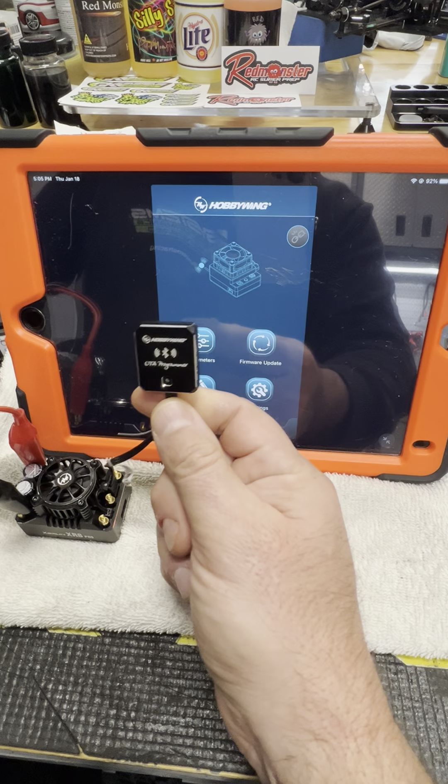Now I'm going to say my preferred method is using this device right here. This is the OTA, or the over-the-air programmer, and this is Bluetooth. What's nice about Bluetooth is your iPad or tablet or whatever device you're having can still be connected to Wi-Fi. Therefore, as soon as you open up your app, if there are any app updates and you're connected to a good Wi-Fi source, it'll just download them, and you don't have to move back and forth between different Wi-Fi devices. Plus, your Bluetooth connection is significantly more robust. It just works better.

I already got it hooked up to a battery. I'm going to power on the speed controller. I get a light. You're going to notice the fan. The models that have a smart fan, the fan will go for a second, turn off. That's normal. Your OTA has got a red light. It is ready to connect. Now, this is a brand new OTA, so it's still going to be default. The default password is all 8s. I do recommend remembering the password after you've changed it, but for right now, I'm just going to confirm and log in.

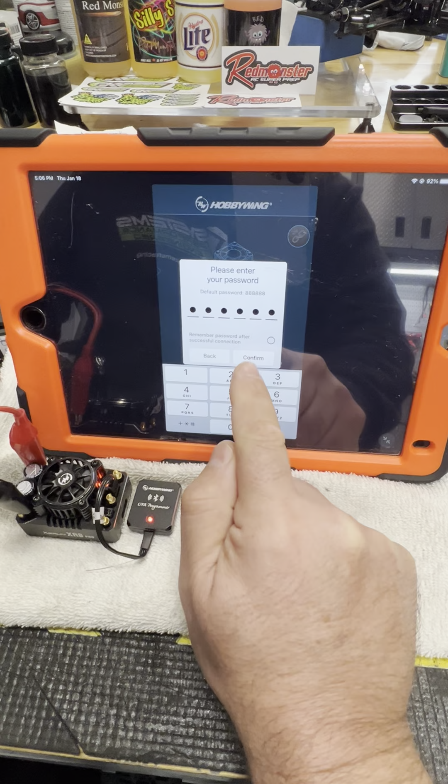Now, at this point is when I like to go to my settings, and I just want to get this done, get it out of the way. For the sake of the video, I'm not going to do this right now, but settings of the Bluetooth module. And here's where you're going to change the name, change the password, all that good stuff. Do something unique. That way you can identify yours in the sea of Wi-Fi modules, wherever you'll be. And no one will accidentally get onto yours by putting in the default password. All right.

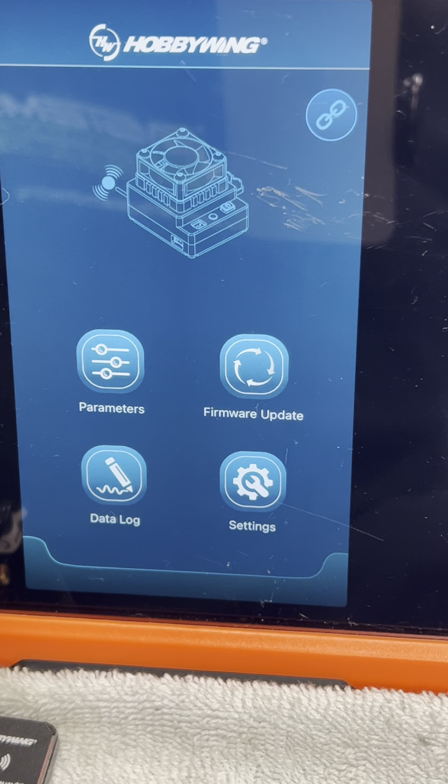Let's dive into the speed controller. After I do my Bluetooth settings, the very next thing I like to do is a firmware update. I want to make sure that I'm working on the most current firmware before I put a lot of work into the speed controller, because it's just going to wipe it out. You're going to have to do it over again. For the sake of the video, I've already done my firmware update, but this is where you would go. You'll see that my target version and my current version are the same. No reason to do it. If you want to check, you can check what your different firmware versions are.

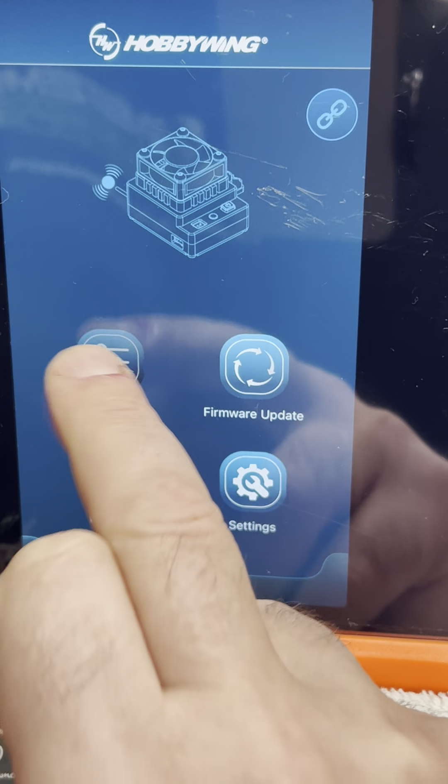Let's dive into the parameters. When you connect to it, it's going to upload the current parameters. I've already programmed this speed controller for a customer, but we're going to switch profiles and start with a brand new profile so we can go through it. When you hit there, you're going to see 0 timing, 1/8 off-road, and drag race. This is mine. I like to put it here just to have these free. So let's go to 0 timing, and we're going to start from scratch.

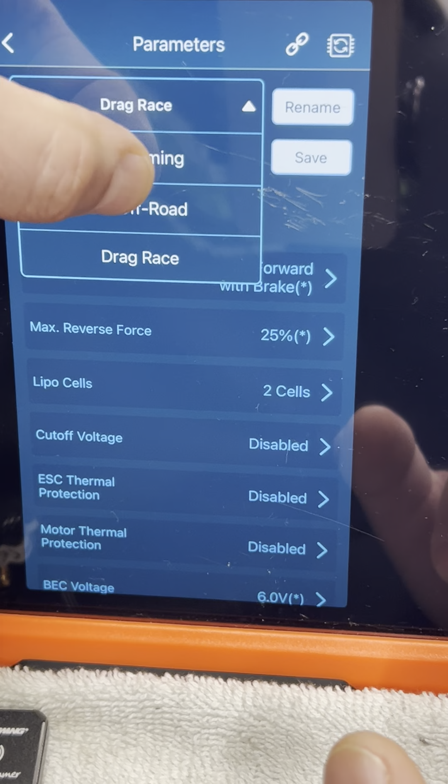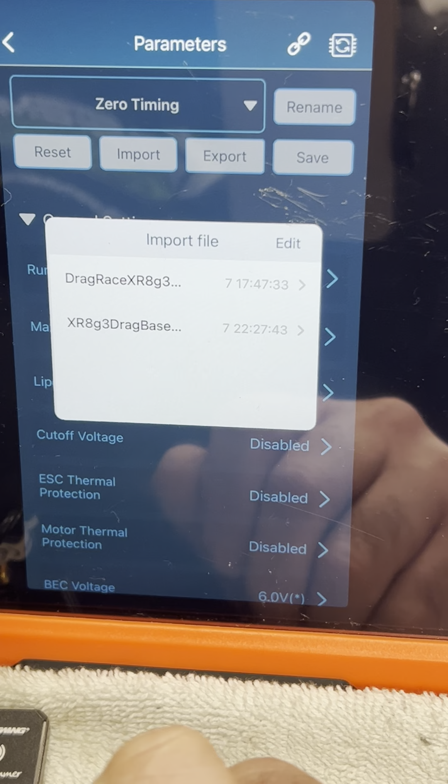Something to be aware of is anytime you make changes, you hit the save button and it'll save. If you have a really nice tune, you can export it and then re-import it at a later date. Let's say you make some changes, you don't like it, you don't remember what you changed, you just hit import. In this case, I go import, you already see I have a base. I can click this and it'll import it. Import, you see it already changed it over to drag race, and it put it right back to where it was. So let's go to a profile and we'll go from there.

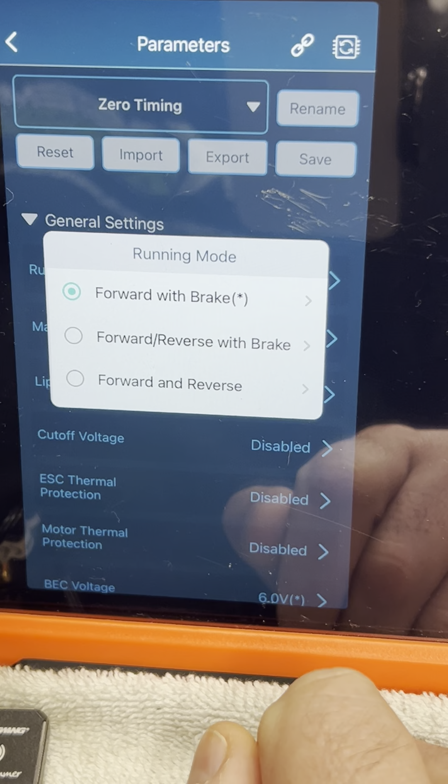Running mode, this is the first one, and it is set to forward with brake. I like forward with brake because most racing organizations do not allow reverse anyway. If you are running reverse, which is fine to do, understand that sometimes if you are moving the brake around on the radio, you could accidentally engage reverse. In some cases, that could be very bad. If you feel like you need reverse, you can use it, but I definitely don't recommend forward and reverse. I'm not even sure why that's there, but it is. So forward with brake for me.

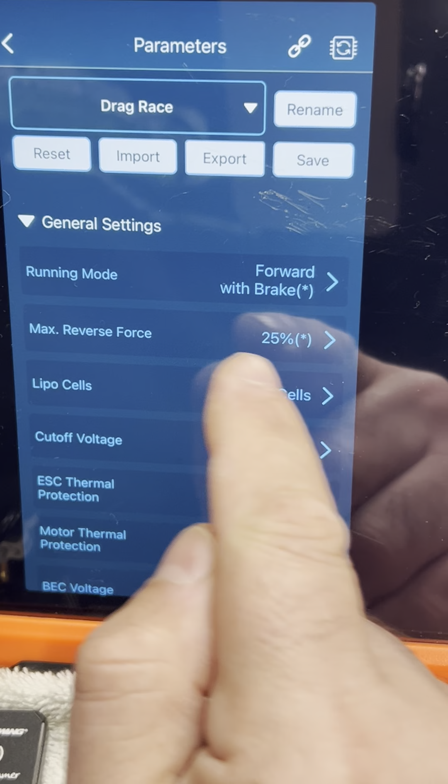Apologize, I'm trying to do this through the camera. Now your max reverse force, again, we're not using reverse. Let's go to 0 timing. Just want to start fresh. Max reverse force, I'm not using reverse, so we don't need to worry about it.

My LiPo cells is set to 2. You can have it set to auto, 2, 3, or 4 cells. I already know that I'm only using this particular one on 2 cells, so I'm just going to put it there. Cutoff voltage, ESC thermal protection, and motor thermal protection, you may notice, are disabled. I recommend just starting out with them disabled if you're new, and then turn them on.

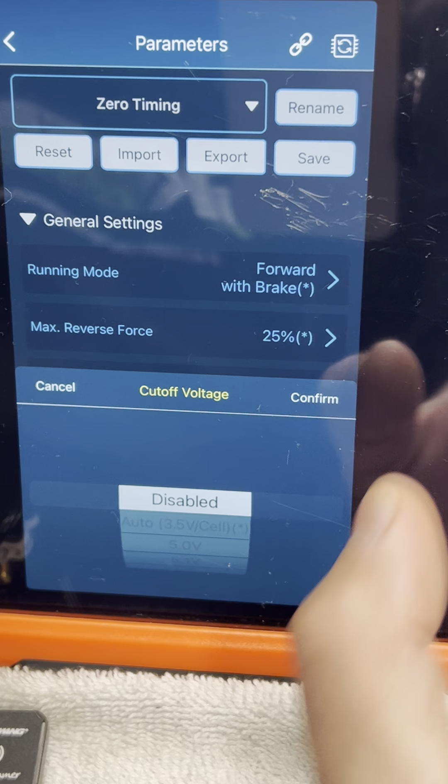The reason I say this is what I don't want to see people do is inadvertently have a setting in here that messes up with something that they're doing on the car, and they don't know what it is. So if these are all disabled, you can start turning them on one at a time, and if something happens, you can at least troubleshoot it back to that.

Now, I will tell you, for 95% of the applications, you should be using these protections. They're very helpful. They're there to protect the motor, speed control, things like that. But just to eliminate the initial variables, start with them disabled. If you're drag racing, 100% keep them disabled.

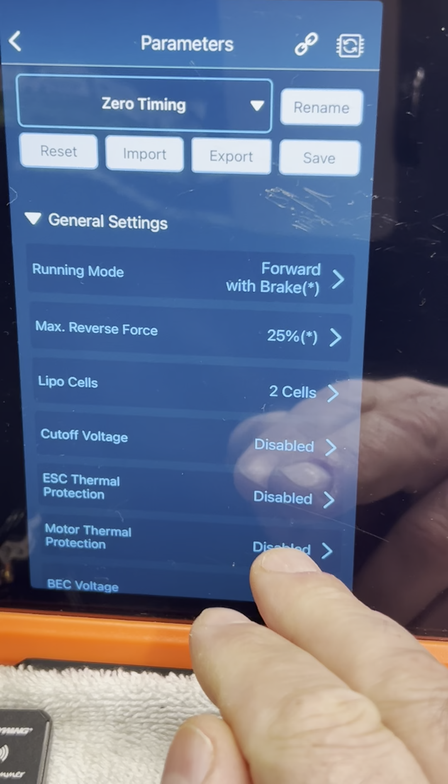If you're drag racing, you really should know what you're doing. Pay attention. You should not be running your battery voltage down, and you should not be hot lapping it, getting it too hot. Okay? But if you're not drag racing, you're doing something else, you should be running these. But just to get it running the first time, let's eliminate the variables.

Your BEC voltage, this is your battery elimination circuit voltage. This takes the place of when we used to have battery packs on our cars to power our receiver and servo. Right now it's set to 6 volts. You do have the option of 7.4. This is for high voltage servos, receivers, things that can accept 7.4.

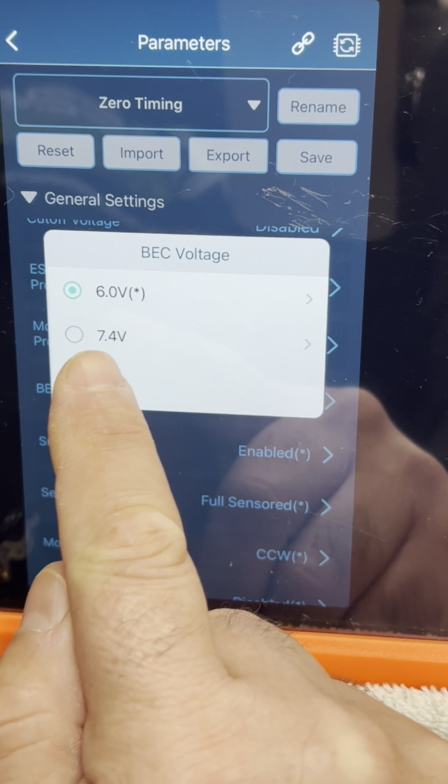The reason you would use this is your servos may be stronger and maybe they work quicker. You may get more torque out of them, so on and so forth. But this will be with compatible servos. It's just safe to run 6.0 unless you really know you want 7.4.

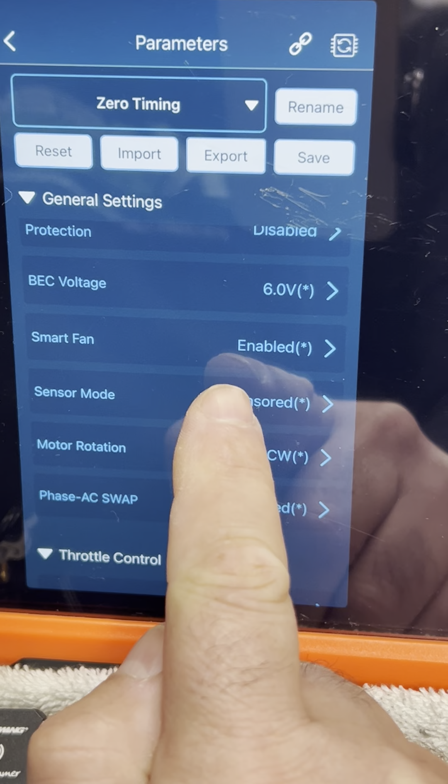Here is your smart fan. Smart fan is enabled. If for some reason you want your fan to run all the time, you would disable it. But HOBBYWING's done a great job with this. Speed controller, leaving it enabled is a good way to go. Sensor mode, fully sensored. Now this is the one that trips some people up.

HOBBYWING will tell you in their manual, if you read any of their literature, full sensored with their speed controllers is only recommended when paired with their motor. This will become apparent when we get through this video, but their motors communicate with the speed controller in a certain way that the speed controller takes advantage of, the communication protocol, to realize some additional benefits that are in the program and they're just not available with different brands.

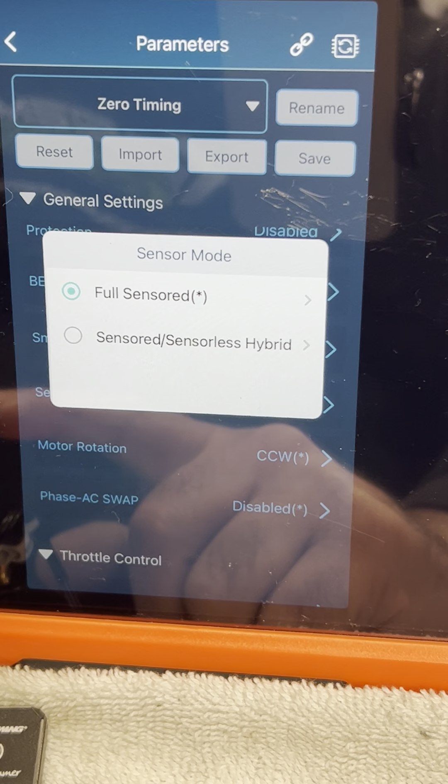The motors, on the other hand, are compatible with any speed controller. When you're using the HOBBYWING, especially these new generation speed controllers, the most current ones, they are designed to be paired with a HOBBYWING motor. If you do not pair it with a HOBBYWING motor, it's fine. You will just select this hybrid mode and you're good to go. But because this is going out to customers and you're using it with the new Drag Race 6500 big block, we're fully sensored and we're ready to go.

Motor rotation, counterclockwise. This is the standard direction in RC. We go counterclockwise. Now, there are some chassis installations and things like that that require the motor to go the other way, clockwise. All right? If you need to do that, here's where you do it.

You will not, and I repeat, not swap the wires like some people have done on some of the older systems. If you've been into RC for a while, you are not swapping the wires to change the motor direction. It's very bad. Don't do it. These new speed controllers, you are not meant to swap the wires. Now, this is going to lead to something that is going to contradict what I just said, but it's for a different purpose.

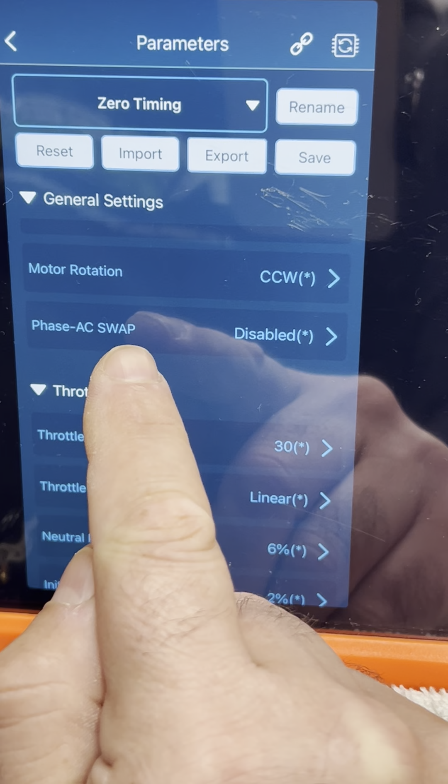Here is your AC swap, okay? This is to swap the A and C, but only for the purpose of when you've connected it to the motor backwards. Why you would do this is because it makes the wires lay out in a way that's more advantageous for some reason. So in this case, you're going to have the A on the speed controller going to the C on the motor, and the A on the motor going to the C on the speed controller. Instead of going A to A, B to B, C to C, the A's and C's are swapped.

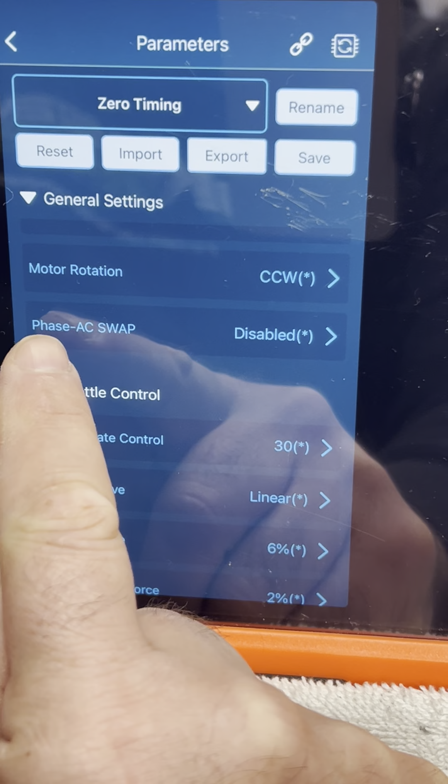That's when you use this. It is not to change the direction of the motor. It's simply to tell the speed controller that for whatever reason, you have taken the A and the C and swapped them to the motor, and everything will continue to work normally. Motor rotation is where you change the direction of the motor. Phase AC swap is just because for whatever reason you needed to swap the wires, okay?

Throttle rate control is a number that is assigned to the throttle sensitivity. It's essentially a quickness to the throttle that changes the feel of the car. Now, I will tell you, these HOBBYWING speed controllers are very powerful, as most speed controllers are, and most people tend to overuse this number. For what I do, I like a number between 4 and 5. Sometimes I start at 1 and I just work my way up until I'm happy.

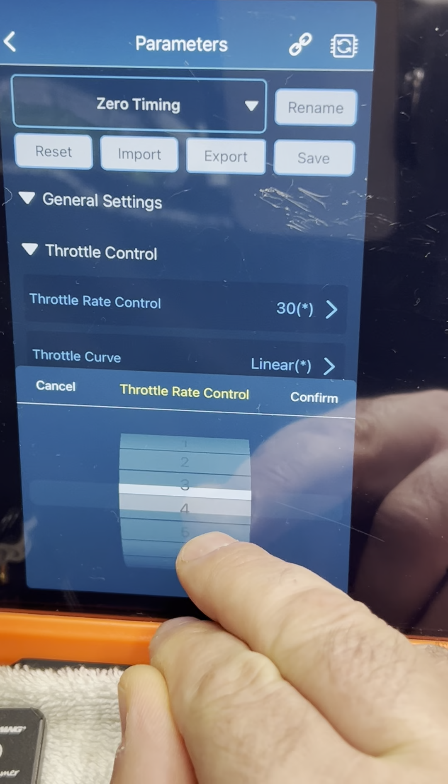The only time I ever find myself maxing this thing out is when I'm using a very, very small motor. What I mean by small is a very high turn motor, a 21.5, a 25.5, maybe even a 17.5, and it just has no power, and I'm not very sensitive with the throttle. I'm being very aggressive with the throttle because the motor needs all the help it can get. But if you have a powerful motor, a mod motor, a drag racing motor, things like that, start at 1.

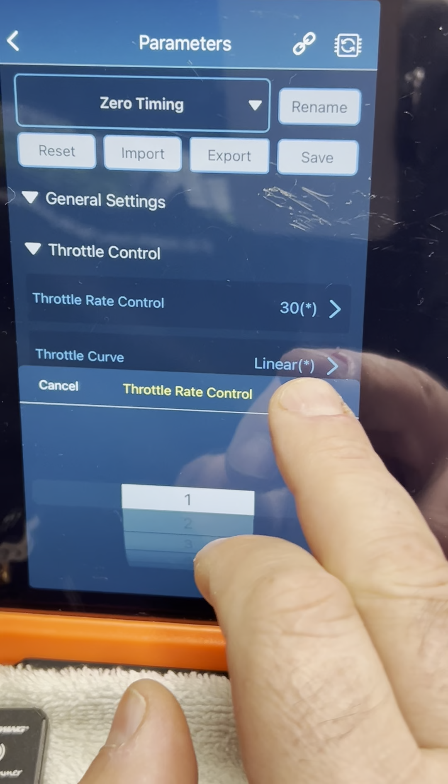All right. Honestly, you're not going to know what 1 does until you try it. So start at 1. I already know from my setup from testing that 3 to 4, 5 maybe is pretty good. But if you're new, just start at 1. It's going to help you out. And then do this one at a time, see how it feels.

Throttle curve. This is the big one, guys, especially if we're drag racing, but it's useful for a lot of things. I think the throttle curve is underutilized by a lot of people. Let's talk about it. So you see here right now it's set to linear. Linear is pretty standard, just a straight line. We're going to go to customized. Now you see when we are customized, it starts out as a straight line. What does all of this mean?

Well, the bottom is the throttle position. This is the input from the radio. Remember, the radio is outputting a signal and the speed controller is receiving it as an input. These are the inputs, 25%, 50, 75, 100, so on and so forth. But there's nothing saying that the motor power output has to be 1-to-1. Does not have to be. Matter of fact, there's a lot that we can do by manipulating this curve.

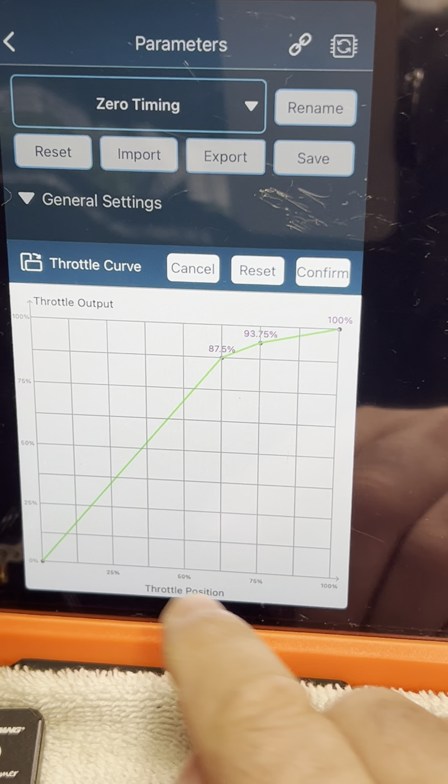So for instance, let's say that we want a little bit more torque at 50% throttle. Maybe we even want a little bit more torque over here, over here. You see, there's all kinds of things that we can do. And at the same time, maybe we like this ramp, but maybe it's a little too aggressive here. Well, let's just knock it down a little bit here. And we can change the way this is. Now, again, this is not a curve that I'm saying you should use. This is just an example, but it's an example of the way you might want to think about it.

Now, this is going to tie into something we're going to talk about in a minute. So for the sake of this video, we're just going to leave it right here. Now, you see, this is pretty aggressive. At 50% throttle, we're at more than 60% motor power. And then by 75%, we're almost at 100. But let's just pretend that our drag car can use this, all right? And I think this is a pretty smooth looking curve. So we're going to confirm and save it, all right?

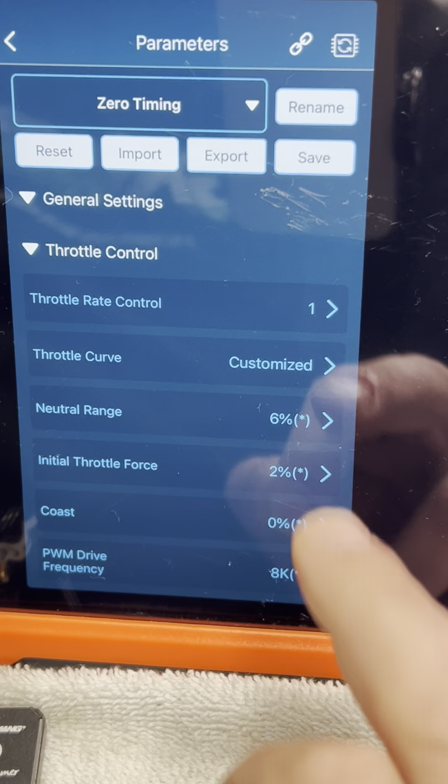So it's there. Now, our neutral range, this essentially is the amount of play in your radio before it goes into the power curve.

So essentially, how much play is in the radio before it clicks over. I personally like 4%. I've tried 3%. 3% is just too edgy. I think just even resting your finger on the trigger can move the car. But I think if you're just gentle, you can put your finger on the trigger at 4% and the car won't move. And then the very instant you put any pressure on the trigger, it starts moving.

But it's not saying that you need to use that. If you're doing a different kind of racing that needs a smoother application, or maybe it's a very high power motor on a very loose off-road track or something, you might want 7, 8, 9, 10%. I don't know. 6% is the default for drag racing. For my personal taste, I like 4, but that is a personal thing.

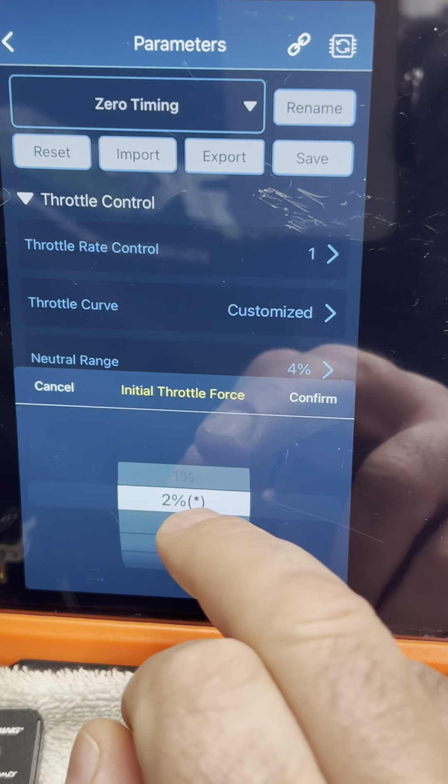Initial throttle force is exactly what it means. How much force will be initially applied before it moves over to the throttle curve. So you just cracked neutral from your neutral range. How much is it kicking the motor? Now, any of you may have watched my reel on the new HOBBYWING drag motors. They start very easy. They do not need a lot of power to start. I have no problem starting that motor at 6%. But for drag racing, I'm going to kick this up to 10 to 15%, and that's just the amount of crack.

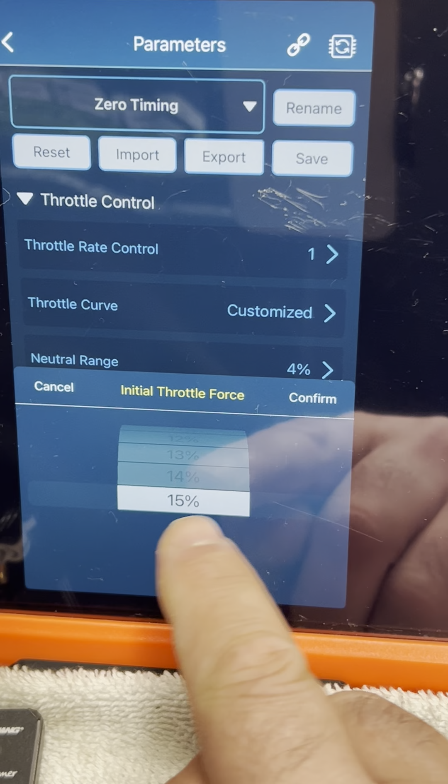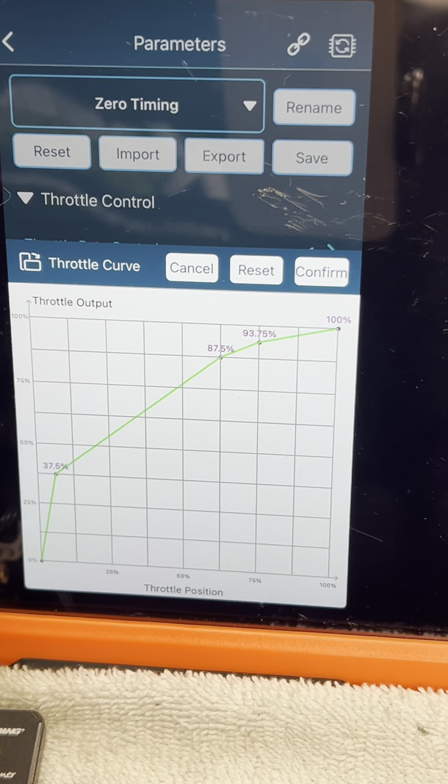Now, I will say, because I already hear some people, what if I need more than that? Well, it's very simple. You go here to your customized, and you will raise these points, and you're going to use the point on your radio. Remember, guys, when we're doing radio tuning, that's a different topic. Point is going to shoot over to some percentage, and then we're going to have some throttle delay, right? We may use a point that shoots up to here, and then we go on some delay. And this curve may be a curve that we like. I don't know. These are just the possibilities.

All right, maybe we want more. Maybe we want to shoot up to here and use that kind of curve. These are all possibilities. So you know what? Actually, I'm going to leave this curve and get to something that I'm going to talk about that's nice on this speed controller. All right. So that's our initial throttle force.

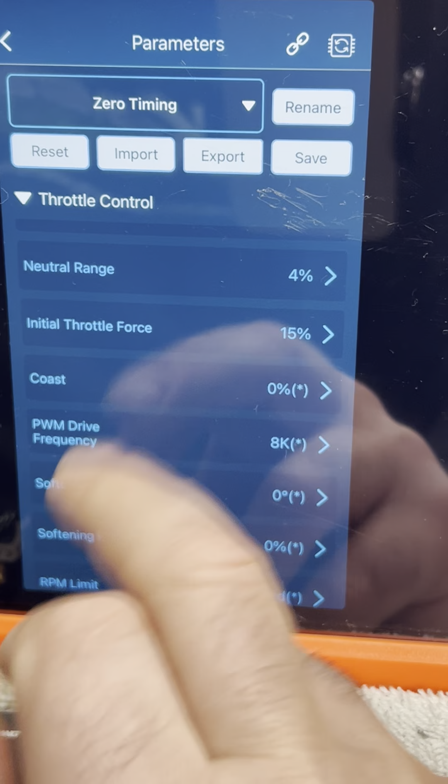And then here is coast. What coast is, a small amount of power that's applied to the motor so that the motor has no braking effect. If you imagine, even if you put it in neutral, if you ever tried to turn your motor by hand, it has some resistance because the magnets have some resistance. So that resistance acts as a very, very small light drag on your drivetrain.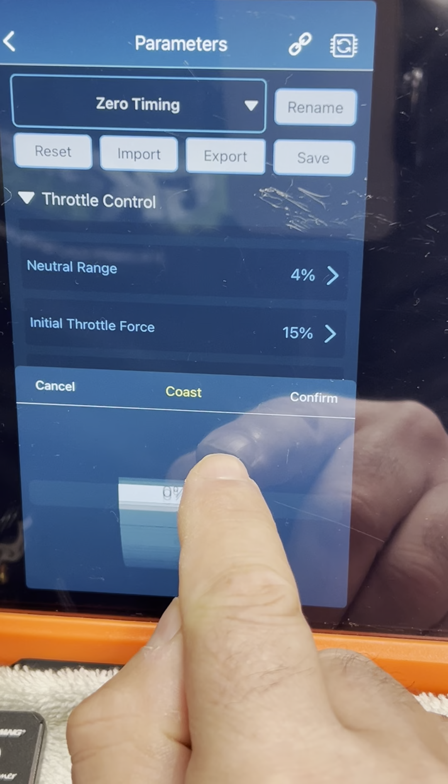Now, there may be some racing classes or things that happen in your driving style that you do not need that little bit of drag because maybe it's making the car pushy or it's doing something that you don't like and you just want it to be free, like as if you were in neutral. Well, that's what you use here. You would just apply some coast amount. This is just some very light amount of power that's applied during neutral, and it is there to essentially just keep the motor from, sorry about that, guys, just keep the motor from dragging down, okay?

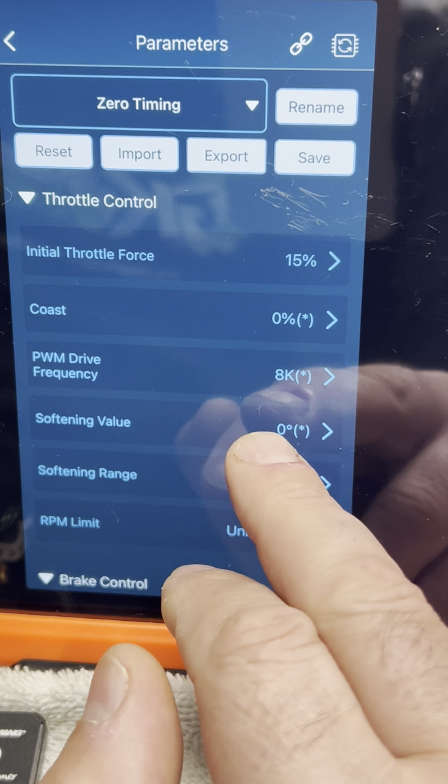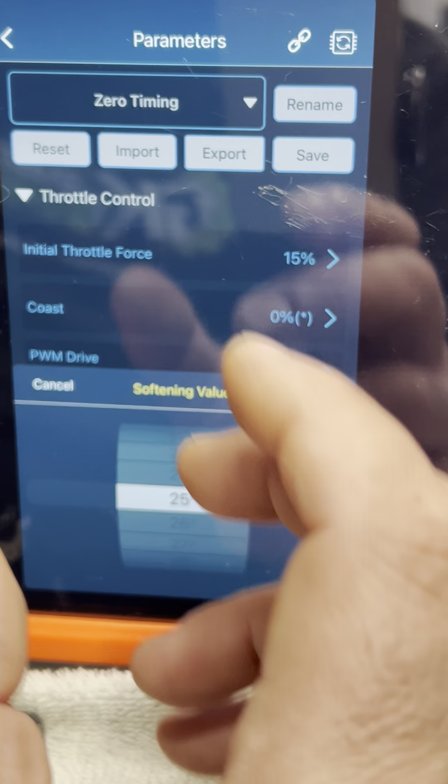Now, this is what I was alluding to. Softening value and softening range. This is the opposite of timing. It is like retarding timing, okay? Softening value, you see, it's all in degrees. So just like a full-size car or electronic fuel injection or even the end bell timing on your can, you can use timing retard to knock that down. This is very advantageous because it may allow you to adjust your motor end bell to some number that is going to be advantageous on the top end and then just knock it down here.

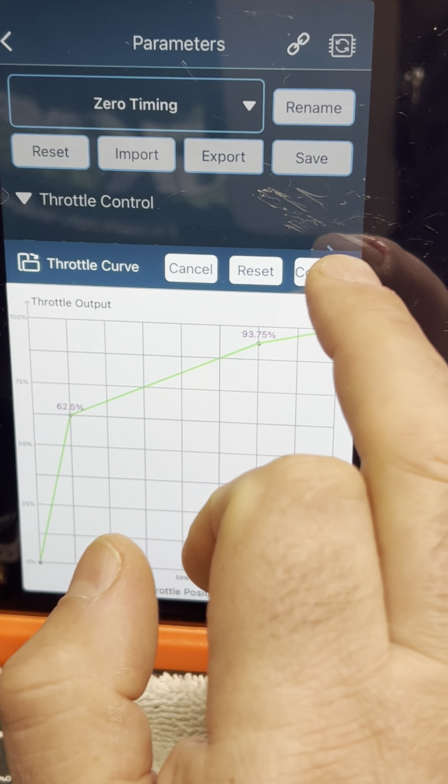Remember, it's also the equivalent of just knocking back your end bell, which a lot of people do. So tons of positive benefits to softening value and softening range. Again, do I think you should start there? No, I think that you start at 0 and use it as applied.

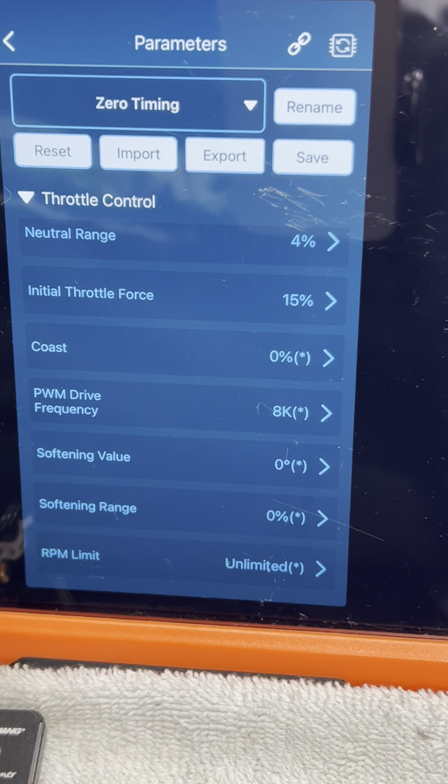Something I'm going to just inject in here. When you're tuning, you should always be asking, what is it that I need? I think a lot of people, and I know because a lot of people call me for advice, they're trying to put something in their speed controller that they think they want, but they don't really know that they need it. And I think that you should always identify what you need and then start thinking about how to get there. So think about what you need. And if it's like, I need a little bit less in this area, well, this may be a good way of doing it.

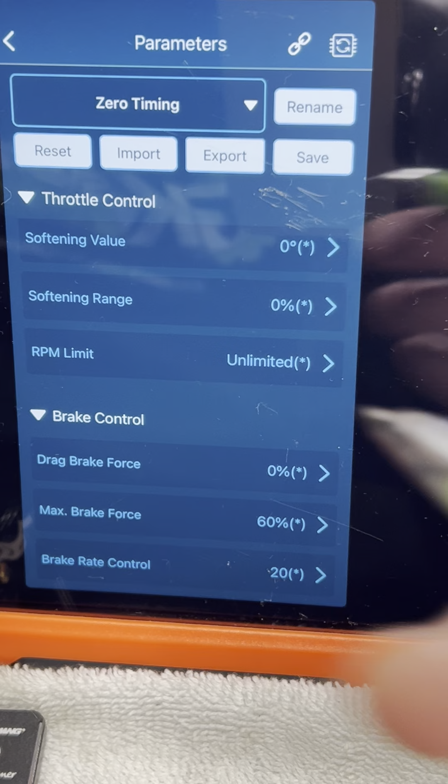RPM limit. This is exactly what it sounds like. This is a global rev limit that will not allow the motor to rev past a particular RPM. So just as I've said before, and this is going to be a recurring theme, when you're starting out, turn this off, okay? Let's not have something interfering with your initial setup tuning. Let's understand what we need. If we need an RPM limit, let's use it. If we don't, maybe we don't need it.

Brake force, max brake force, brake rate control. These are all your braking parameters. Now, here we have drag brake force. This is what I was talking about earlier. This is not the coast. This is the amount of brake that will be dragging when you apply neutral. So when you let go of the throttle, the speed controller may apply whatever number you put here. So let's say you put 10%. That is an immediate 10% of braking power right at neutral. So the motor is going to be dragging with about 10% braking force.

This is actually quite useful because if you have a scenario where you need to get off the throttle and balance the car before you apply the brakes, a little bit of drag brake goes a long way because as soon as you let off, it's already starting to apply a little bit of braking, helps stabilize the car, and then you go. Max brake force, also exactly what it sounds. It's the maximum percentage of braking power that can be applied.

I recommend personally just running this at 100 and then move it to what you need. I'd rather have a little bit more and play with it than be capped at something less. And then all of a sudden you've done all this brake tuning and then you realize, oh, Jesus, I need more brake, and it messes up your tuning. Start with 100, knock it down if you need to, but drag brake force is definitely a good thing. Don't get carried away with that. Just a little bit goes a long way.

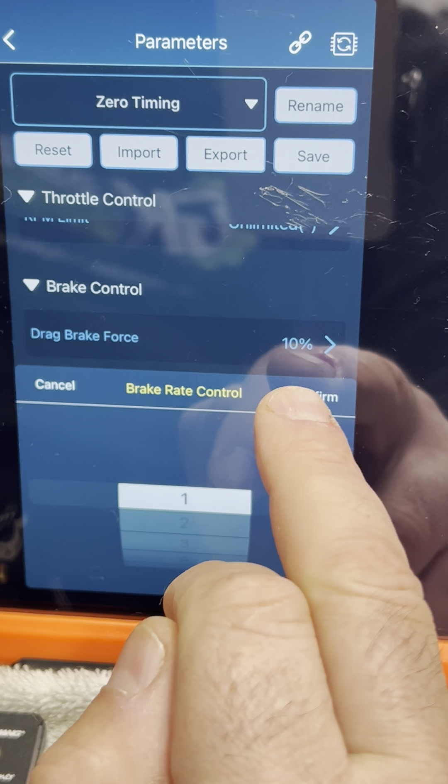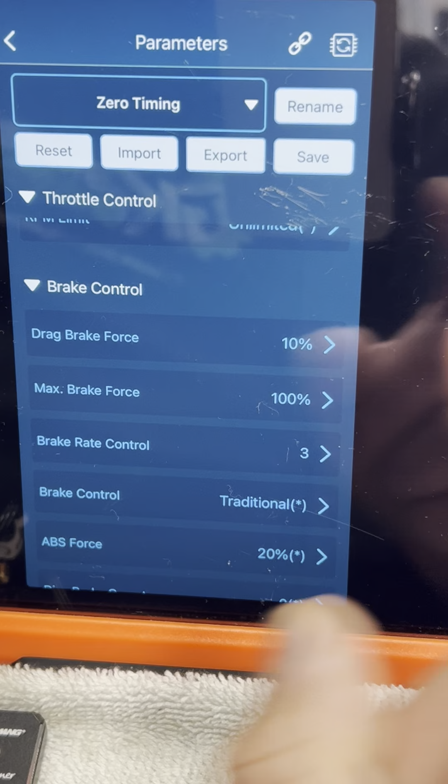Your brake rate control is very similar to your throttle rate control. This you can be a little bit more aggressive with initially because of just the way the brakes are working. But same thing, I like to start with it low and then work up with it, especially for a drag car. Guys, we're going 100 miles an hour. We're slamming on the brakes. We do not have a lot of precision in our brakes. This isn't like an on-road car where we're just playing with them. We're going full on, and slowing down the rate of change that's happening with your finger is going to help you just stabilize the car. Turn that up slowly, see how it works.

Now, here are some really nice ones. Your brake control strategy. You see something here that says traditional, and traditionally HOBBYWING speed controllers have had the best brakes in the industry. I don't know anyone who's been using HOBBYWING speed controllers for any period of time in any form of racing, on-road, off-road, whatever, that never said the brakes are awesome. They've gone even a step further and now added something called disc brake feature. Now, this does not mean you're using a disc brake. It means it acts similar to how the brakes on a race car work. And again, remember how I said the HOBBYWING speed controllers need a HOBBYWING motor. That's because there's more things happening in the communication than just the sensor timing.

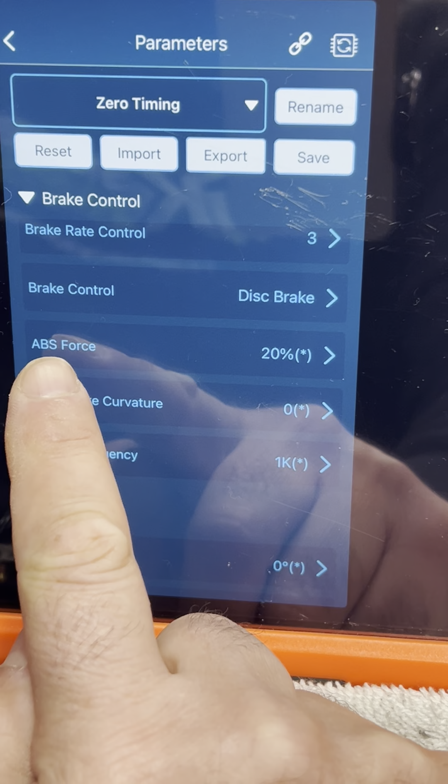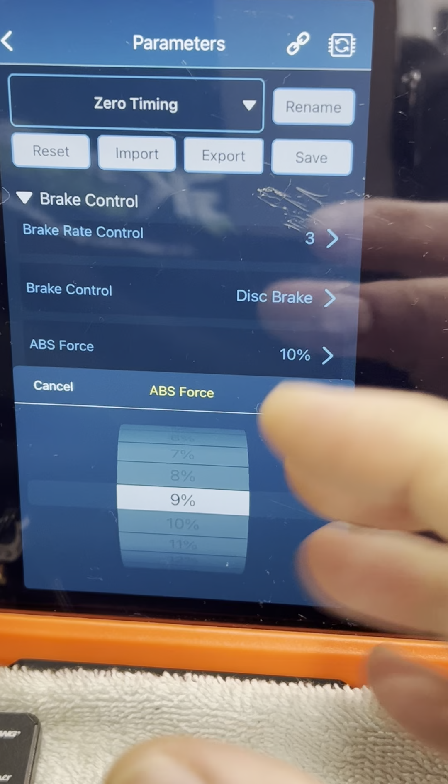This ABS force, what does this mean? Well, ABS force is a form of ABS, and it works by sensing when the motor is starting to lock up. So you're on the brakes really hard and the wheels lock. When the wheels lock, it's a direct drive connection, the motor locks. When this senses the motor is starting to lock, it will go into an ABS type strategy where it'll back off the brakes and then apply whatever amount you put here, 10, 20. So this is a way you can get on the brakes and then just as it's starting to lock, it'll free up, apply 9%, free up 9%, until it sees that the motor is starting to rotate normally, and then it'll go back to the normal brake strategy. This is a tremendously useful feature.

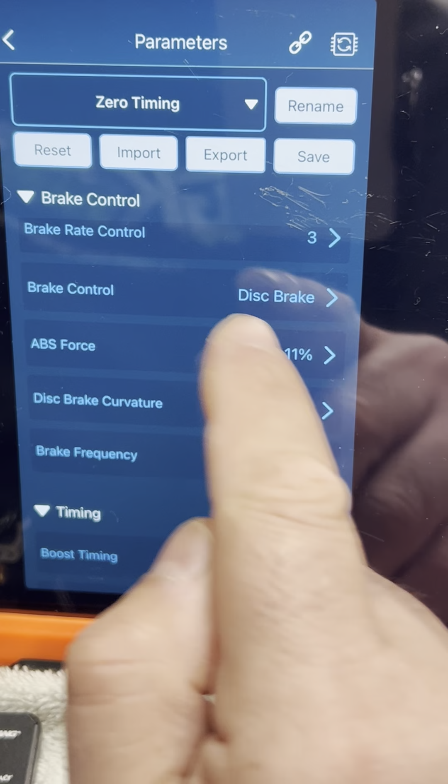It works so well, it makes your brakes so smooth in more than just one form of racing, so many different forms of racing that you're going to use a speed controller. But this ABS force only works with disc brake. So disc brake, ABS force, use it. I recommend it. This disc brake curvature is a very similar kind of concept to Expo, in my opinion.

I just leave it at neutral, 0, sorry. If I want some kind of brake Expo, I'll do that in my radio. But if you don't have a radio that's smart enough, or it's maybe lacking some of the features you might want, you can do that here.

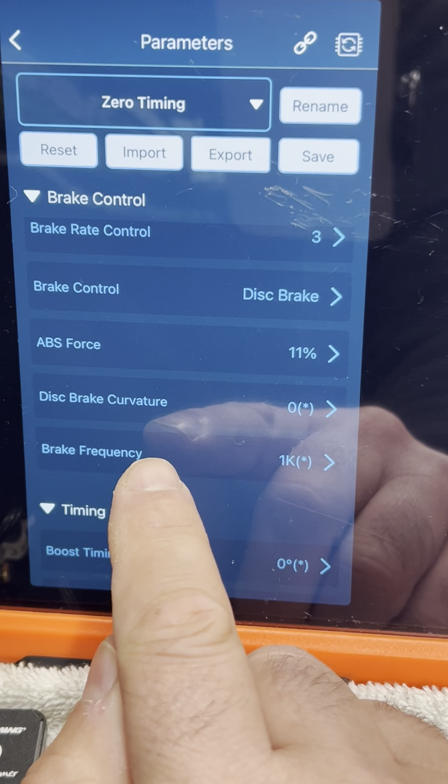Brake frequency, okay? Oh, you know what? Did we? We did. Okay, I'm sorry guys, we skipped PWM drive frequency. Let's talk about that now because it ties into our brake frequency. I'm sorry, I think I noticed I skipped it.

You may have a lot of people talk about PWM drive frequency. What is it? What does it do? Well, this is the frequency of power that's being applied to the motor while it's in the drive or run positions, whether that's under braking or forward power. Well, what does this mean? You may have heard that lower numbers are more aggressive, while higher numbers are smoother. Well, why is that? What does that do? What does it even mean?

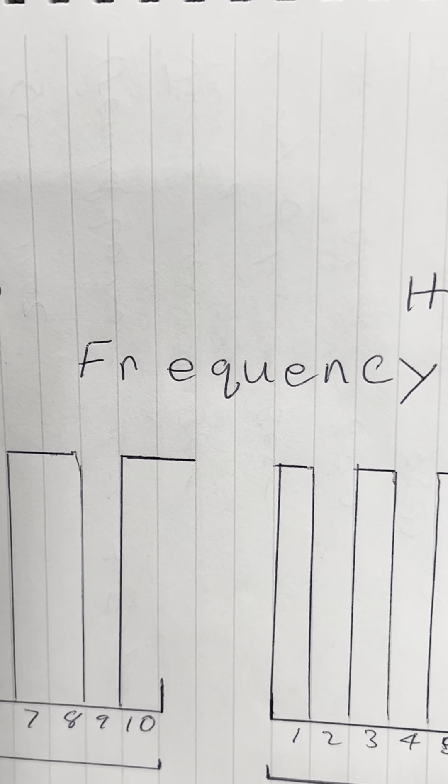Let's talk about what it is. Well, I prepared here a drawing, and I'm going to just zoom out a little bit to see if we can see it a little bit better. Okay, here we go. All right guys, I'm trying to...

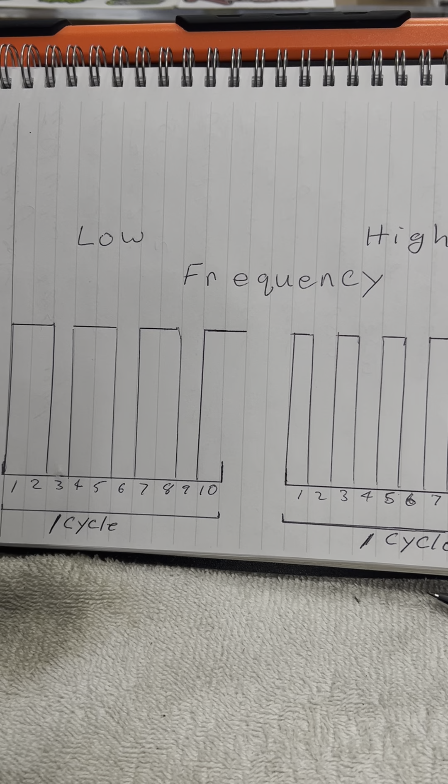Now we see here that we have some low frequency and some high frequency, okay? And you'll notice that, here we go, sorry about that. So we have a low frequency, we have a high frequency. The low frequency are like those small numbers, 2K, 3K, 4K. Your high frequency is like your big numbers, 12, 16, 24, 32. But what is it, all right?

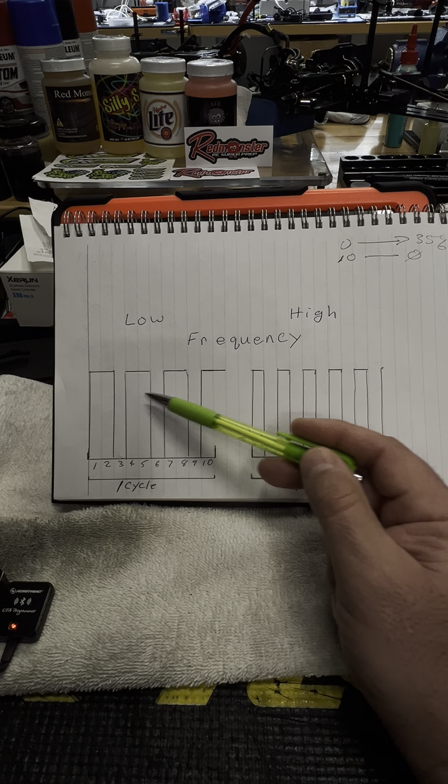Well, we need to understand that one cycle, 1 hertz, is always going to be a cycle of frequency in 1 second. That's 1 hertz, 1 cycle, 1 second. So we are fixed in this block of time. How many cycles, or what is our frequency in one unit of time, 1 second? Well, you see here, to fit big blocks, right? This is a really big on followed by an off, really big on followed by an off, like that. We just can't get as many of them in there. In this particular example, I got 1, 2, 3.5, in 1 cycle, but they're big blocks.

So really big on, it hits really hard, off, hits really hard, off, hits really hard, off, and then it moves over. Now we go to a high frequency. It's just more of them. It's a higher number. So to fit more of them in the same block of time, they have to get smaller. So we have an on, off, like this. Now this is a very simplified diagram, but I think it proves a point.

So what does this do? Why is it smoother? Well, the high frequency is similar to moving this paper or this notepad like that. Very gentle, but I'm doing it quickly. The low frequency is very hard hits.

Now, make no mistake, the lowest frequency you can get away with ultimately will be better because it produces less heat, it's more efficient, it's easier on the motor, but it is very aggressive. Now that does not mean you run the lowest frequency on the speed controller, it's the lowest you can get away with. So if you get away with 8, you run 8. If you get away with 6, you run 6. If you get away with 12, you run 12, right?

It's really going to be determined by the setup of your car, how much grip you have, and what kind of motor you're running. But remember, the low frequency are these big, hard hits, followed by a short period of off. The high frequency hits, it's all the same power, but the duration is different, because it's a frequency — how many times can we do it? High frequency, we're hitting more in the same unit of time. Low frequency, less, but we're hitting it harder and longer while we're on it.

That's frequency. Again, ultimately I've made the most power — every time I've dropped frequency on the dynamometer, I've made more power, but it doesn't translate to something that is always available to be used on the track. Just because I can run a low frequency on the dyno, it's not applicable on the track.

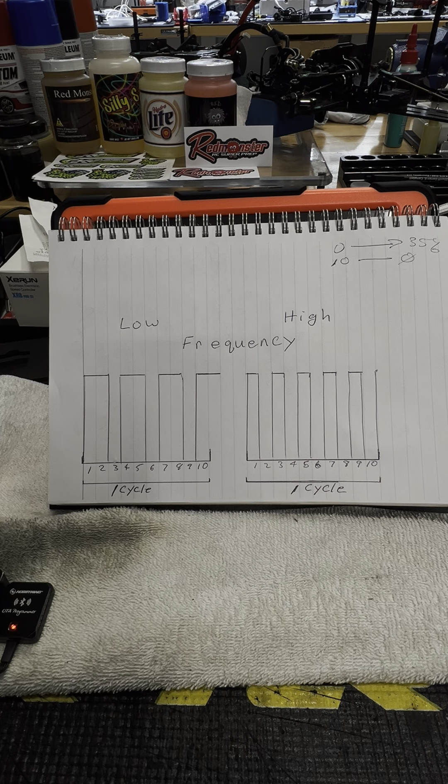And I'm going to tell you, use a higher frequency to start, work your way down. I really think starting somewhere around 12 is kind of a good place, maybe 16, somewhere around there. I think I would avoid very, very high frequencies as it can produce a lot of heat in the speed controller, but somewhere in the middle, like 16 to 12, is a good place. And then just slowly work your way down, see how your car handles and what your lap times or ET is.

All right, let's get back to the tuning parameters.

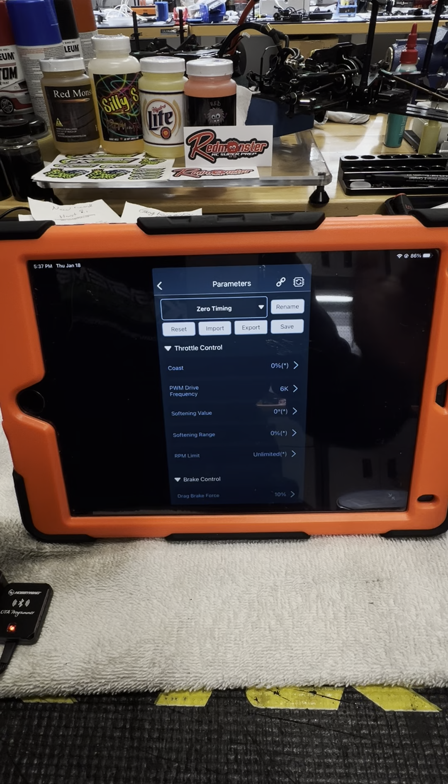One second, let me get this unlocked. All right, now we're back. And let's zoom in again.

So we covered the drive frequency, and it is the same for the brake frequency, okay? It is how the brakes are going to be applied.

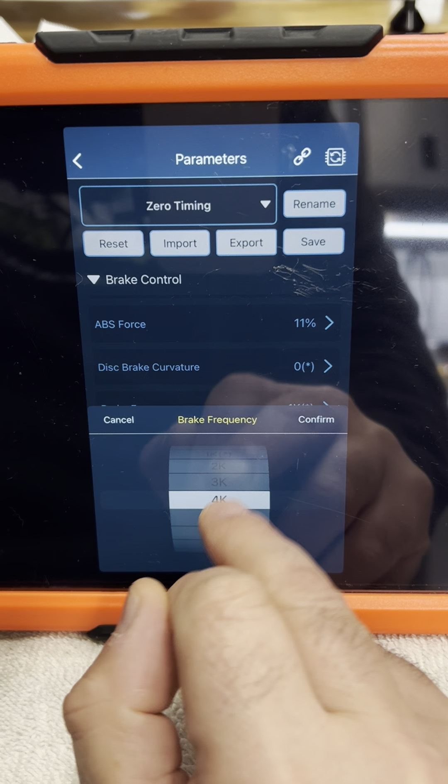Now, let's talk about everyone's favorite topic, timing, okay? I'm going to zoom in on this a little bit more.

There we go. Now, I may have said this earlier, but across the board, HOBBYWING speed controllers all have very similar parameters, with small differences between different models. Generally, as you get to the XERUN, the professional racing series, you're going to find that they're pretty much the same parameters and they tune pretty much the same. As you get to the EZRUN or QuicRun, you'll find just a little bit of these parameters are removed, just for what is applicable for the purpose of that product. But the professional series is going to have the most tuning.

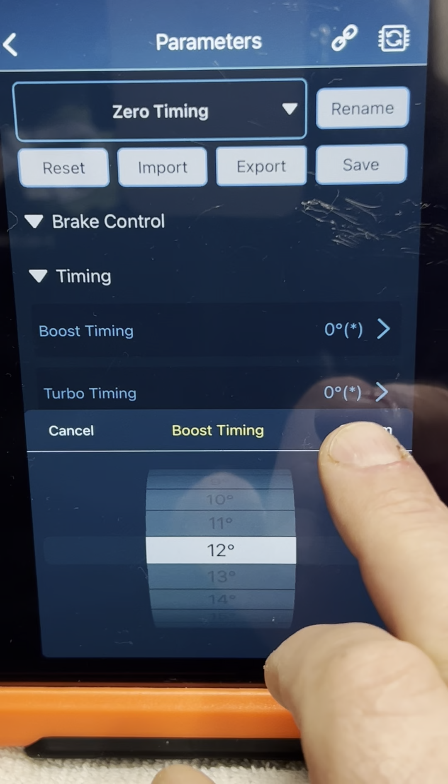Now, for this particular Speedo, the boost timing is a little bit different than what you may be accustomed to. The boost timing is a global number, okay? Let's pick this one, 12. It is a global number that the speed controller will intelligently apply, and what it does is it intelligently applies it to keep the motor accelerating.

It can sense — again, why it has to be paired with the HOBBYWING motor — it can sense the acceleration of the motor, and it says this is how much timing I have to play with, and it will look to keep the motor accelerating, especially based on what it's seeing, the input from the radio. If it's seeing the radio is saying, hey, I want a lot of power, it will do this. But this ties back into, very circular guys, your throttle rate control.

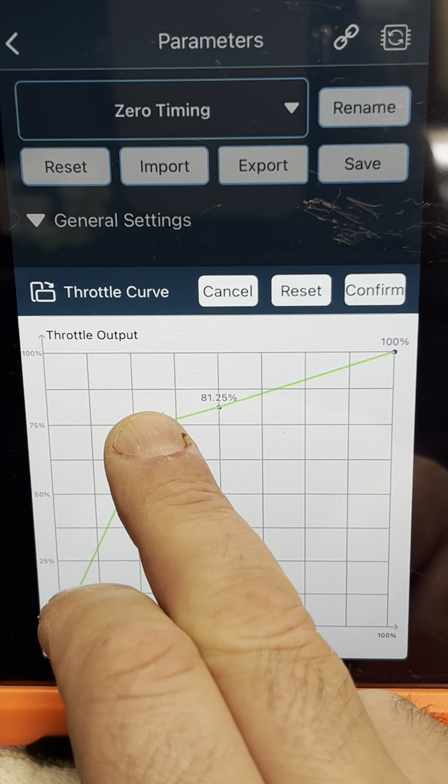Pumping up the throttle curve on the dyno and using less boost, letting the ESC figure it out, has always won. So I recommend trying to do more with the throttle curve. Keep your boost low and let the ESC do its job by figuring out the global number. That's gonna then lead you into turbo timing.

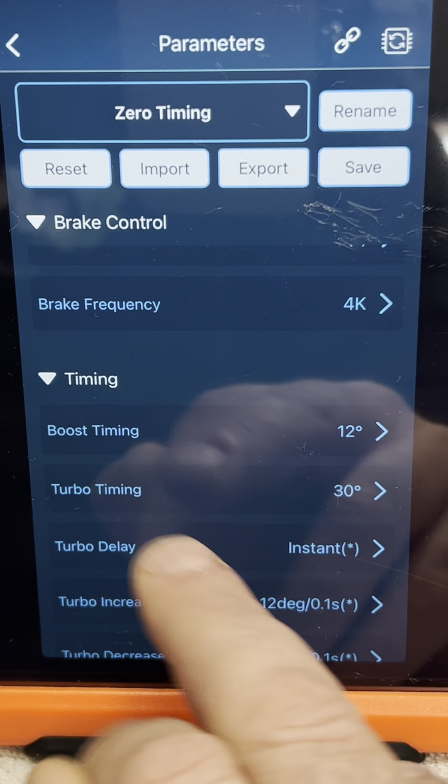Turbo timing is important because, let's just say a number like 30. At this point we've already reached our maximum torque requested output. We're at full throttle, asking for every bit of performance the motor has available. Well, how do we get more than 100%? We do it by adding timing.

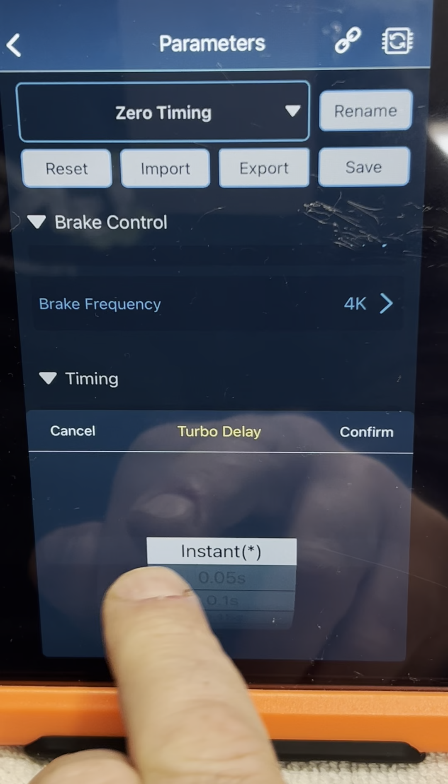So once we've gotten everything out of the motor and we're asking for maximum load, we start feeding in timing. Now what turbo timing is going to do is, when you look at the current draw, you'll see your throttle go up, your RPM go up, and your current will be high, but then the current starts to drop off. Where the current starts dropping off is a good indication of where you need to start adding your turbo timing and how much, and that moves into the turbo delay.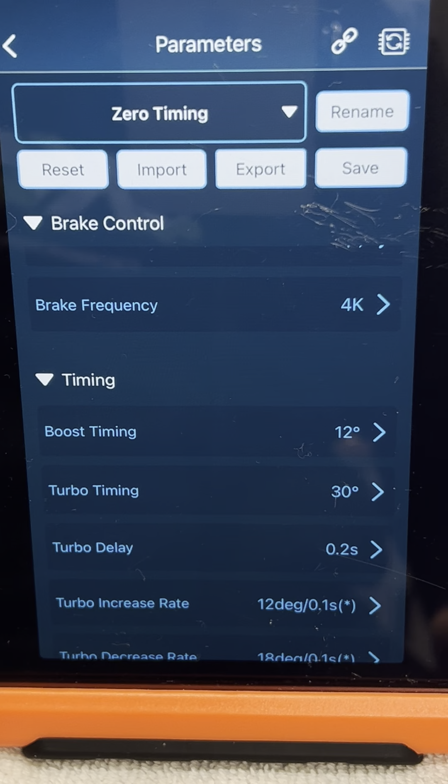How much delay you have says, okay, we reached full throttle here, and we're holding full throttle. Our current is still really high, but then it starts to drop off over here. Well, we don't need to add timing right where the current's still high. We can delay it just a little bit. Just before it starts to drop, we want to start picking up this current and keep the motor accelerating. That's how we use turbo timing, because by that point the speed controller has given it all it can give, and now we need to pump it up. We do that with the turbo delay to get it at the right time.

All right, let's talk about the turbo increase rate. The turbo increase rate is how many degrees for every 1/10 of a second will be applied.

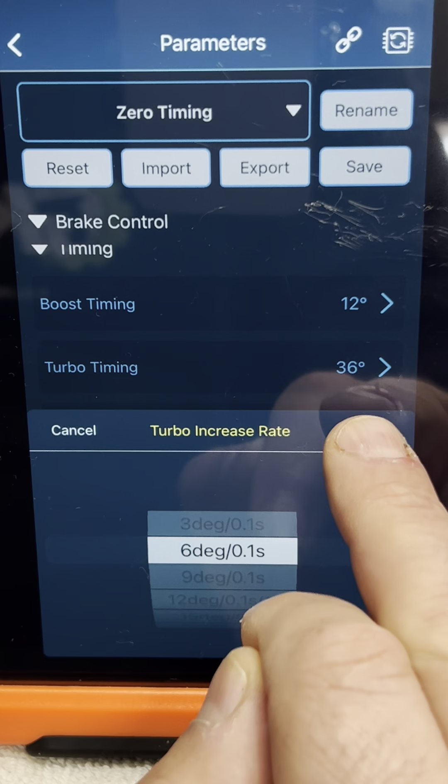Let's just do a simple number. Let's make this 36, and let's make this 6. We see here we have 36 degrees of maximum turbo timing, and our turbo increase rate is 6 degrees every 1/10 of a second. What does that mean? It means it will apply 6 degrees every 1/10 of a second, and it will take a total of 6/10 of a second to get to 36 degrees, because 6 times 6 is 36. So 6 times 1/10, 6/10.

Now, if you add that to your turbo delay of 2/10, you are now at 8/10 of a second after full throttle. Does that make sense? So we hit full throttle, and as soon as we hit it, it starts looking at the delay. It counts 1/10, 2/10. Now it starts applying 6 degrees, 6 degrees, 6 degrees, till it gets to 36, and it stops applying because it reached its turbo value.

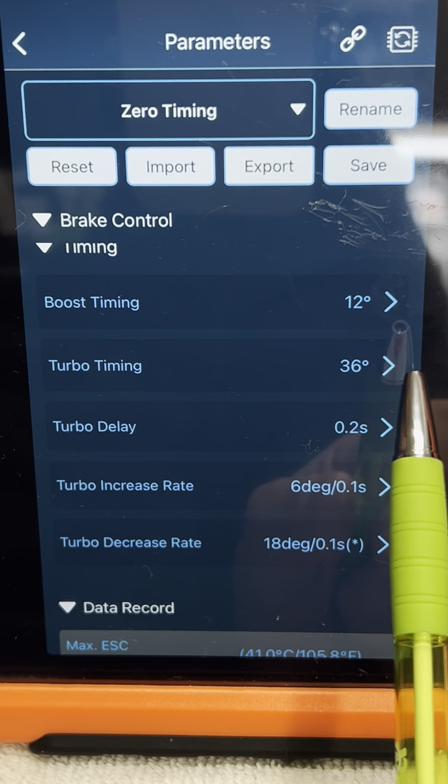Now your turbo decrease rate is exactly that - it's how fast it will bleed off your turbo. There's a couple ways of using this. If you're drag racing, I recommend using it at the slowest, because every time you come off the throttle, it will take a little bit longer to bleed off your turbo. If you come off and have to get back on again, you didn't lose all that much. If you set this to instant, the very instant you come off the throttle, all your turbo's gone, and you got to build it all back up again.

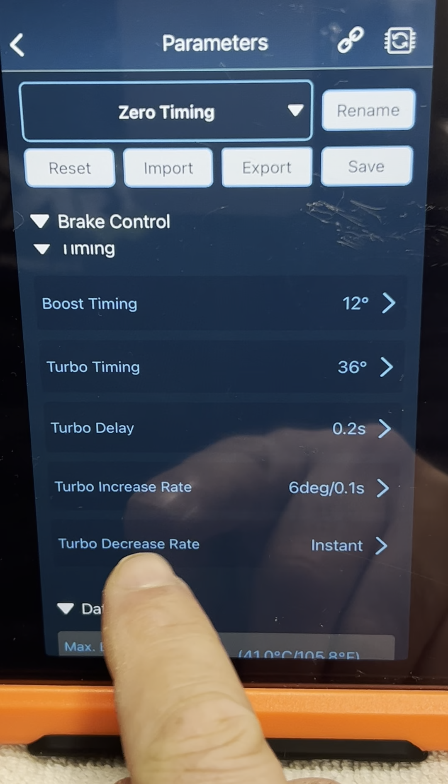But, and this is the big but, if you're doing something different - on-road racing, off-road racing - having turbo timing is going to affect your braking, because the way your brake control works is affected by the timing, and you don't have the same kind of braking response, braking performance. So braking is affected by the turbo decrease rate.

If you're doing something where braking is important, I would not set this very slow, but start somewhere in the higher spectrum. Matter of fact, there's almost no reason not to have it instant, because let's just say you're on-road or off-road racing, you're at full throttle and you come off the throttle to get on the brakes to go into a corner.

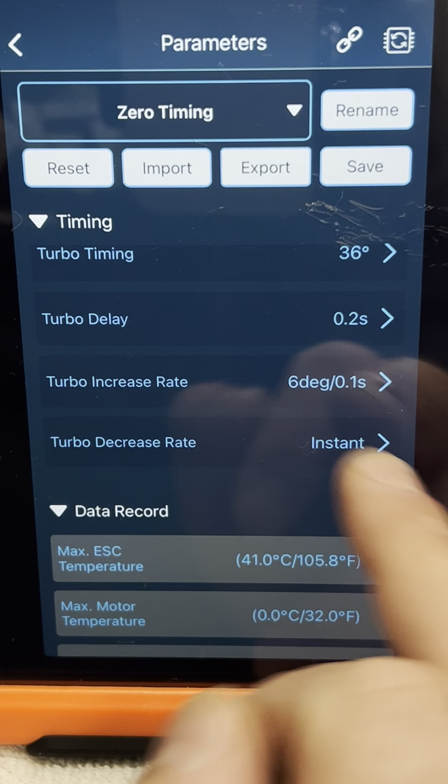Well, you're going into a corner and now you're going to start to apply some throttle at the entry and then apex and then exit. You don't need all that turbo messing you up. So, but if you drag racing, go the slowest that you can.

Now you're going to see here, there's some data numbers. This is just generic, very simple values that's from the speed controller. All the data is stored on your OTA right here, and it's recalled by your OTA, all right? Once you have downloaded it from your OTA, it'll go into a file, and it'll be saved on your laptop or your device, and you can review it at any time, all right?

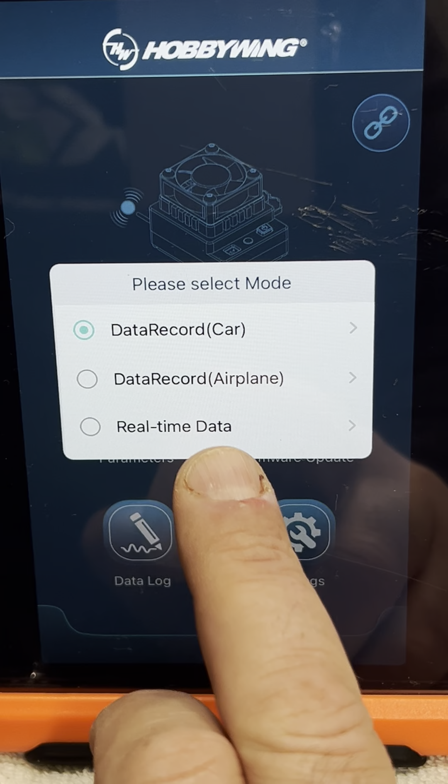So how we do that is we go to settings. Oh, I'm sorry. We go to data log, and we're going to see real-time data. This is what we want. Now, I'm going to just stop for a second. I did a quick reel earlier where I showed the HOBBYWING Tunalyzer hooked up to a speed controller. This is a great screen, this is like real-time telemetry. You can watch all this move.

So if you had your Tunalyzer hooked up to it and you were moving your throttle and you want to see what some of your values were based on some of the changes you were making, you can do it in the screen. Super helpful. This is a real-time screen. If you wanted to see what your mile per hour would be, okay, you just change this over from RPM to mile an hour, and it'll tell you what your mile an hour is.

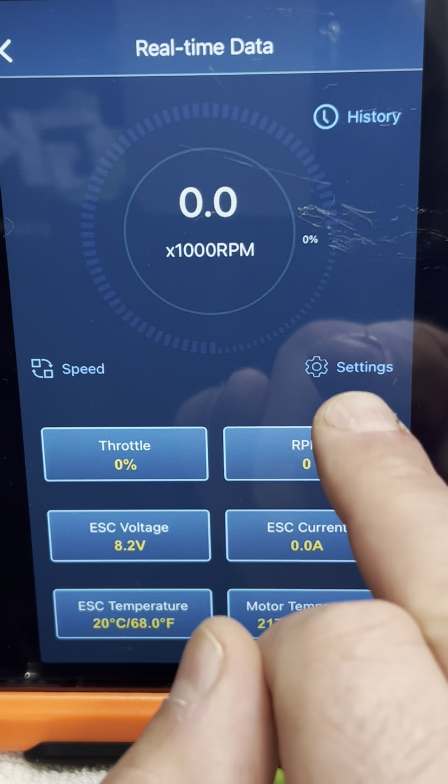So remember, we had these settings. We put our gear ratio, our motor pole, and our wheel size diameter in millimeters, and we have a unit selection mile per hour, right? That's what's happening here, guys. We want to know what RPM we're producing, what mile an hour. We do this here, real-time data, super easy to do with the Tunalyzer.

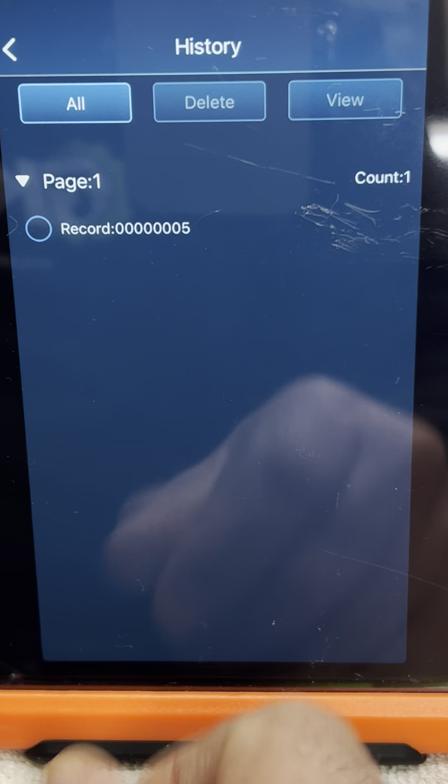But, okay, we want to look at data. We go to history, and we have from OTA or from file. Now, if you have not downloaded it before, the first thing you're going to do is from OTA. And you're going to see here, it just has one because we just hooked this up for the first time. All this really is just the startup data. There's nothing there. But if I go back here, history from file, here's where it's really nice, okay?

All of your data is stamped with your name, whatever, and the date and time. All right, the date and time is super handy because now you can go back, and if you're keeping notes, you know exactly what date, what approximate time, if you did 3 runs that day or 5 runs, and it's the first one, second one, third one, fourth one, whatever it is, you can just look at the timestamp.

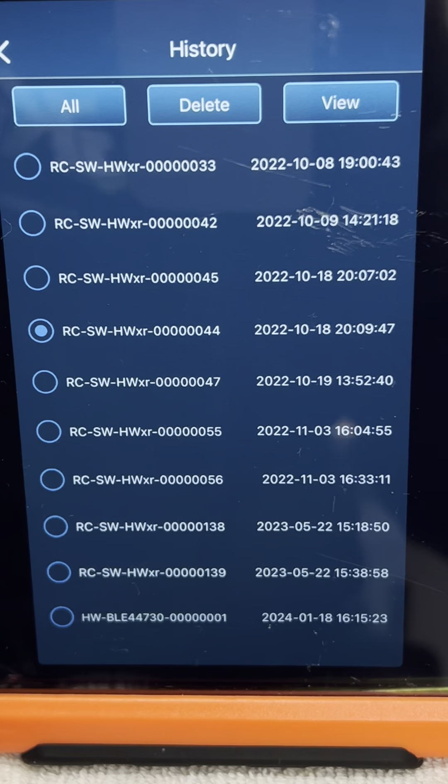To view it, you select one, you hit view, and now I'm going to tell you on the iPad, this does work sideways, so I'm going to turn it like this, but it's very similar to maybe some things you've seen. You just use your finger and you scroll and you have your RPM, throttle position, voltage, current. Now, this was an older model. Speed control did not have current, so current's blank, but this one does have current.

But remember, this is from 2022. This is 2 years old. So this has been out for a while. This is a 2022, but you can see here, you can see my battery voltage, my RPM. One thing to note about this HOBBYWING data logger, it is a high-speed data logger. It picks up much smaller imperfections. It's probably going to look a little noisier than what you're seeing because there's less filtering because it's more samples per second.

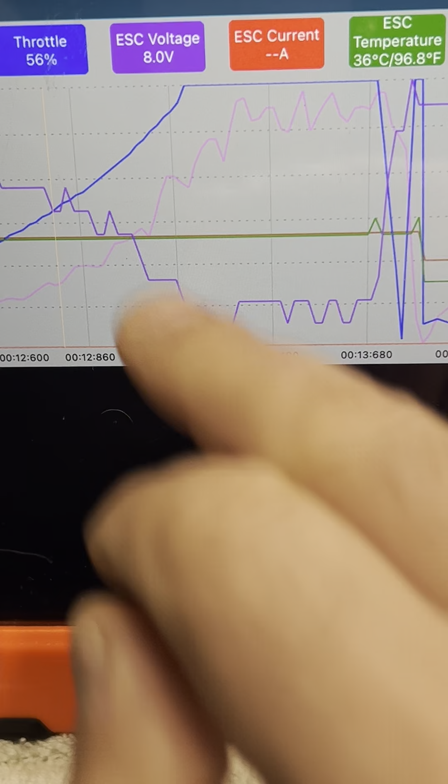Now, I can tell you this was on a bumpy, dirty road, and it wasn't the greatest of runs, but this is just an example of how it picks up all the little fluctuations. Very, very nice data logger on this, and you have everything you need. So there you go. And that's it, everyone. I don't think I have any more for you.